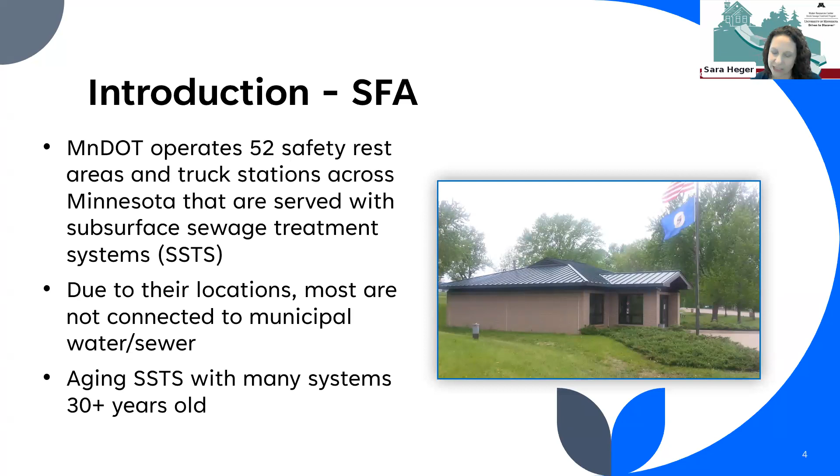I think when we started our partnership with MnDOT, with Neil Ryder, who's going to be talking later, he had recently inherited all of the infrastructure, including many of these old septic systems that were likely in need of replacement. But when you have a lot of things that might need replacement, how do you actually prioritize that? That really was the goal of how this project started: to evaluate every single system.

So we wanted to not make assumptions, but to go out in the field and look at each system, and then work with MnDOT to develop a risk framework for how they could plan for the future, over the next 5, 10, 15, 20 years. The other nice thing is that once you have a good inventory, it also gets easier to plan for the future and know when upgrades might be needed long-term.

So the framework that was developed was meant to support and be a decision support tool. That certainly assists with budget planning. And I think the great thing that we didn't know at the U of M when we started this project is that we would have sites where we could continue to do research.

The great thing about these rest areas is they are used all year round. There's some seasonality to some of them based on where they're located, but in general they're used by a wide range of people at a pretty consistent level, and they're very accessible. So they're really good locations to do and test research activities.

I will discuss, though, that they're not exactly the same as what you would envision at a house or maybe even at a resort, because they're a little unique in what happens when we go to the rest area.

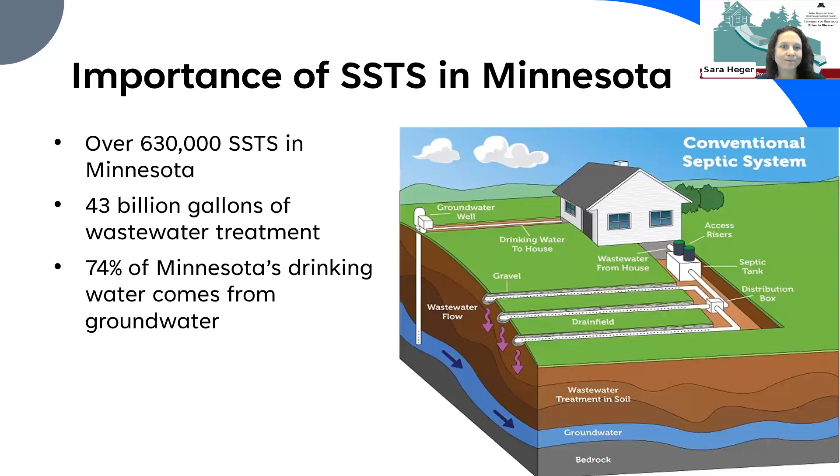I also want to highlight how our septic systems fit into the broader scale. Whether you're in a rural landscape, or think about that being a rest area, we are often either recharging groundwater or recharging a lake, river, or stream with the effluent from our septic systems. This is also true of some municipalities that are pulling up groundwater and sometimes discharging into lakes, rivers, and streams. But septic systems are always discharging subsurfacely—that is the big difference between traditional wastewater treatment plants and a decentralized septic system.

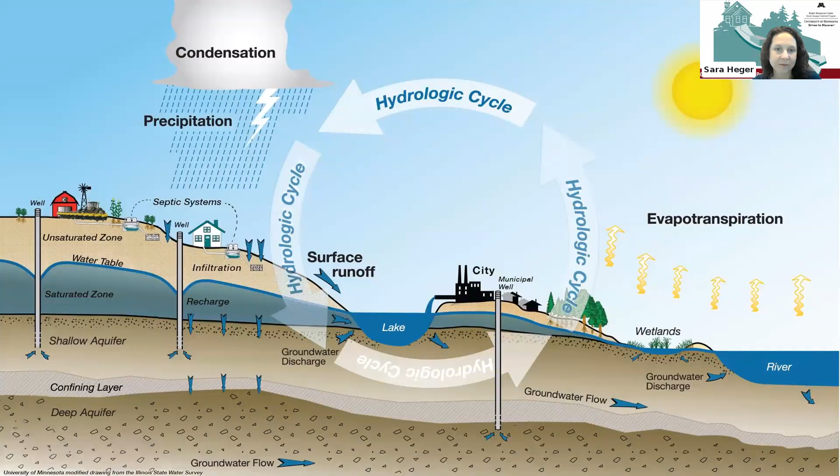So as I mentioned, most septic systems start with really a simple primary clarifier, which is really what a septic tank is. The wastewater does spend several days in that tank, so we do also get some anaerobic digestion. Then with most systems, again, our final treatment and disinfection happens in that subsurface soil treatment system.

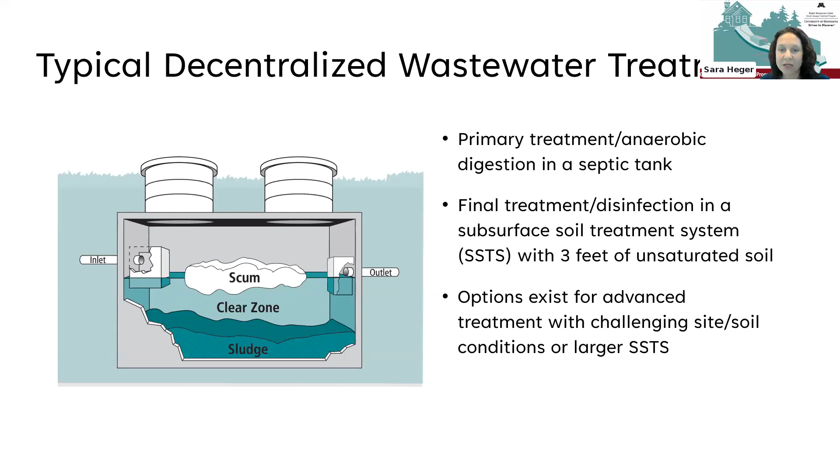And we rely upon 3 feet of unsaturated soil to remove the organics, to remove particularly the bacteria and viruses, the phosphorus. There are additional pre-treatment steps that can happen before the soil. And there are certainly MnDOT sites that employ advanced treatment in between the tank and the soil. Those are more commonly used when you have either a challenging site or soil condition, or with some larger septic systems. So larger might be clusters of homes, or might be something like a rest area.

So I do want to highlight, though, that MnDOT facilities are different, and that was some of the things we evaluated during our risk assessment. The first issue you'll see is flows. The flows are going to be higher than typical homes. And again, there is some seasonality, particularly with some rest areas. I think about, for instance, the one outside of Brainerd on 371. You can envision that, yep, some people go up in winter, but boy, do a lot of people hit that facility in the summer. But then you might take another one, Albert Lea along 35, might be busy all year round, but there are some seasonality issues.

The second issue is strength. The waste is much more concentrated because when you go to the rest area, what do you do? Right? You flush the toilet, and if we're lucky, hopefully you wash your hands, but there's no showering, there's no laundry. So the third thing is, and this kind of relates to the strength, there is a lot of cleaning. I mentioned how nice and clean MnDOT rest areas are, but there is a consistent use of products, at, I would say, a slightly higher level than most homes, maybe not all homes.

Our fourth challenge is where these systems are located. Often rest areas are built on a side of a road. Maybe there was previous construction debris or staging that occurred, or why did we end up with this land? Sometimes it's because it wasn't desirable for other reasons. So that can create challenging site conditions.

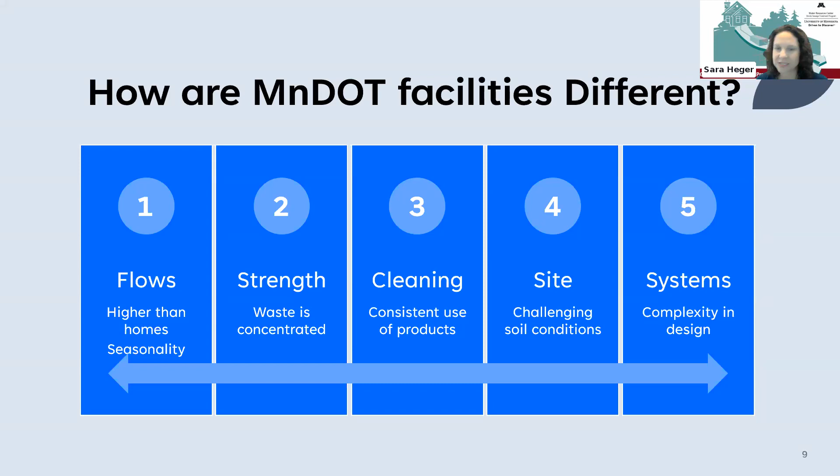And the last one is the systems. The systems in general tend to be not as simple as what we see in typical backyard home septic systems. So when we first went out there, we ran into things like siphons. I had actually never seen a septic system that employed a siphon, and that's not super complex technology, but it just highlights how we tend to see more pumps, more lift stations, more things that need to be taken care of.

So here again kind of highlights the big project we had, which was in 2014 and 2016, where we went out and evaluated all of those septic systems. So it started with really developing the protocol, like what are we going to go out and look at? And we went to a few sites to test it, because until you really get out in the field and start looking at systems, you may find things that you missed.

So after that, we then performed the actual assessment. So that was, again, visiting all of them and gathering all the information, which I'll highlight coming up. Then we developed recommendations, and all along, this work was all done hand in hand with MnDOT. And then finally, we completed the risk assessment. And after I'm done, Neil's going to talk more about how they really took that risk assessment and moved forward with it.

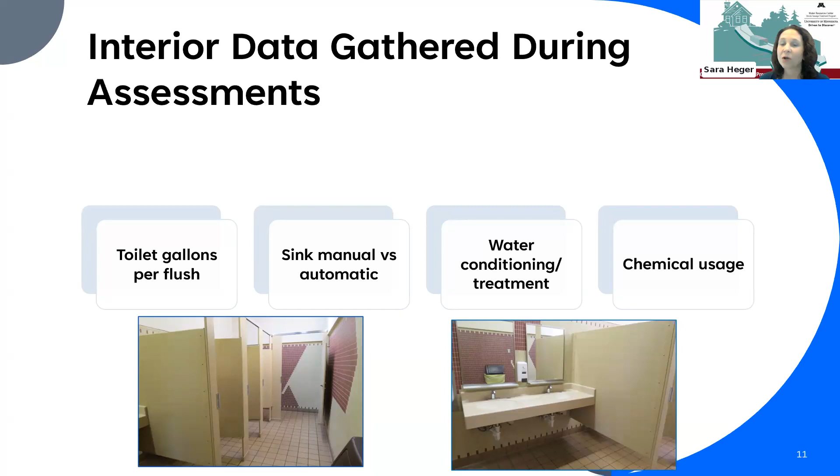So some of the data we gathered, we started with inside the facility, looking at, again, how many toilets, how many gallons per flush of the toilet, how are the sinks set up? Are they manual or automatic? What other water usage? So do they have any water conditioning or water treatment? What are the cleaners and chemicals used within the facility for sanitizing?

So additional data that we gathered inside would have been the flows. So all of these MnDOT rest areas in particular had been writing down daily flow meter data, which I'll just tell you most facilities don't do. So we had some pretty good daily flow data. MnDOT has gone to automating more of that data, which is great, but it was great that at this time, think about this many years ago, they had been gathering that daily data. Because we're not on city water, so we didn't have that other infrastructure built in.

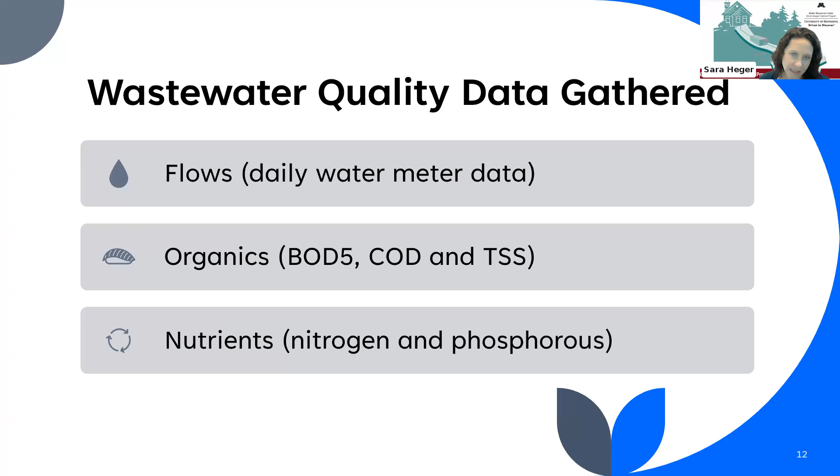The next one is we measured the organic content. So the BOD and the COD and the TSS were all just a measure of, again, how concentrated is that waste stream. And then the last one is the nutrients, the nitrogen and the phosphorus. Anytime you have primarily toilet flushing, these are going to be elevated compared to typical domestic strength waste.

So then after we kind of gathered that data, we then really looked at the septic system itself. So everything from how often had they been maintaining the system. So those septic tanks do need to be cleaned on a regular basis. Are there any problems or challenges that had been faced? But then really the nuts and bolts of what was in the ground.

So most of these systems had drawings, but the drawings were what was originally engineered. So comparing that to what was installed and what was the state or the condition of each of the components. So the septic tanks, how the wastewater got from the septic tanks to the dispersal system. Was it gravity? Was it siphoned? Was it pumped? How large was that soil treatment system? And did that match the flow data?

So when these facilities were designed, they had to estimate what the flow data would be. And again, then the status. So how well was each component performing? And then even something as simple as what's growing over the top is a very important issue. You don't want trees and brush, right, growing over the top of a soil treatment system.

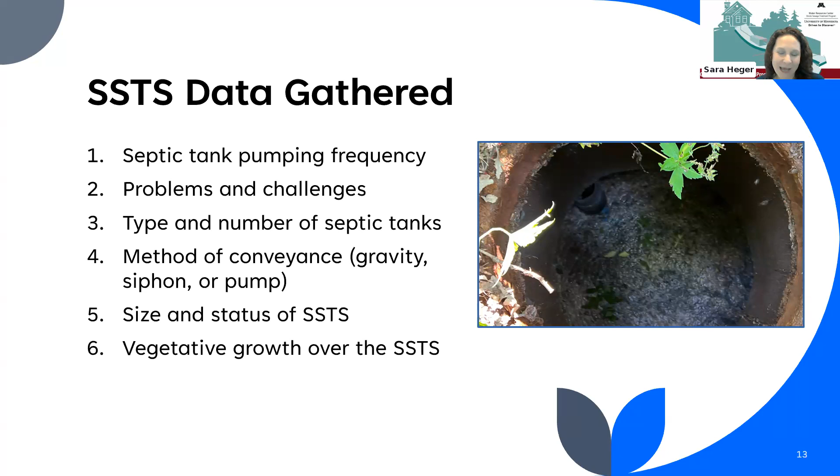So this data was then all fed into a risk assessment. The risk assessment had both a rating and a weight to many of the variables. We really gathered, I think at the end of the day, over 30 different things that could have fed into this risk assessment. And we really then had to determine which of these really was impacting the risk to public health and the environment. That is what septic systems are designed to do, is protect public health and the environment.

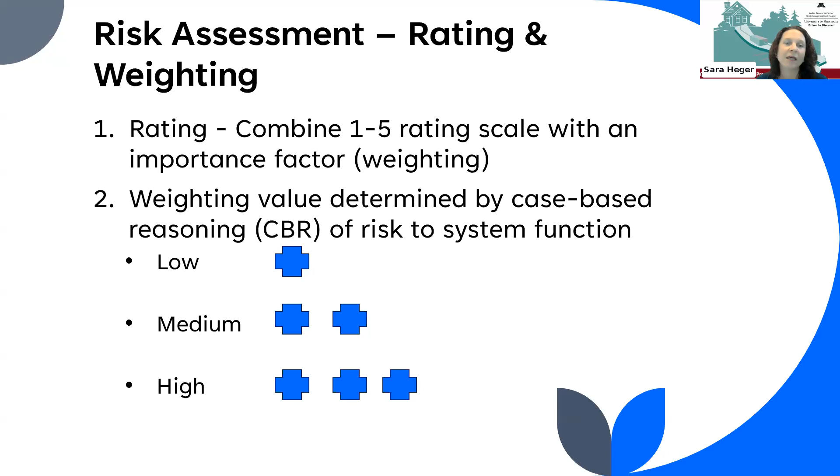So the weighting was either given a low, medium, or high. And it was a case-based reasoning approach that was taken to our risk assessment. So this risk rating, and again, Neil will talk a little bit more about this later, was based on an existing MnDOT rating scale that was used for other infrastructure measurements as far as what status they are. So that scale, again, being 1 to 5.

So we ended up using 18 properties that both best differentiated and indicate risk; that's what we selected. And we had to use some expert knowledge to rate each of these properties. So here's just one example, and I can't get into great depth, but one that I think is kind of easy to understand is flow. So as the system goes up in scale, the risk that it poses to the environment is greater.

So I haven't talked as much about the truck stations. Those are, again, pretty small flow systems, generally just serving the employees that work at that truck station. So those were all in the low flow category. So for this, they would have, again, had a low risk factor. But again, as the flow went up, you can see, there were 8 in that smaller category, and then only 2 that really were above, that had that high risk factor of 1, being over 5,000 gallons per day.

And in Minnesota, again, most of our systems generally fit into those low flows, but we do increasingly have more and more community and cluster systems being built. And that's a lot more water that is going out into the environment.

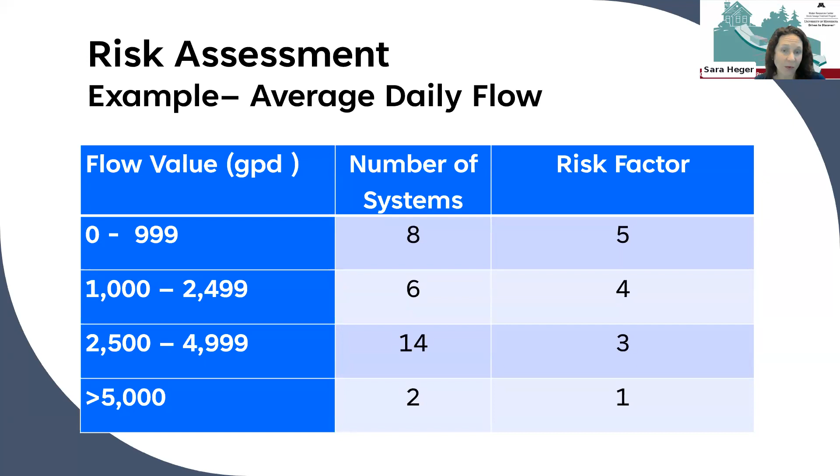So then our examples of that case-based rating that we added. So looking at this and just some example of how that was used. So for each of these we would either amplify or keep it as is. So that average flow, you'll see here, 1.5. If it was surfacing, that was viewed to be a bigger issue. So certainly if the area was spongy as we walked over it, or there were signs that the system had surfaced, that got amplified in our risk assessment.

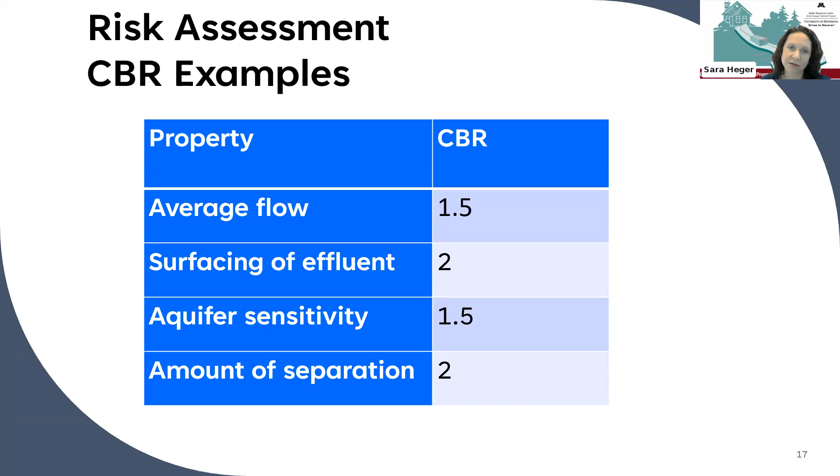If the aquifer the system was sitting over was sensitive, that got slightly amplified. Or if it didn't meet its separation to the limiting condition, that also would have been amplified. So where we ended up, in the high risk category there were 7 systems that really fit into that. We did not have any that were 1, which would have been very, very high risk, but we had 7 in that category.

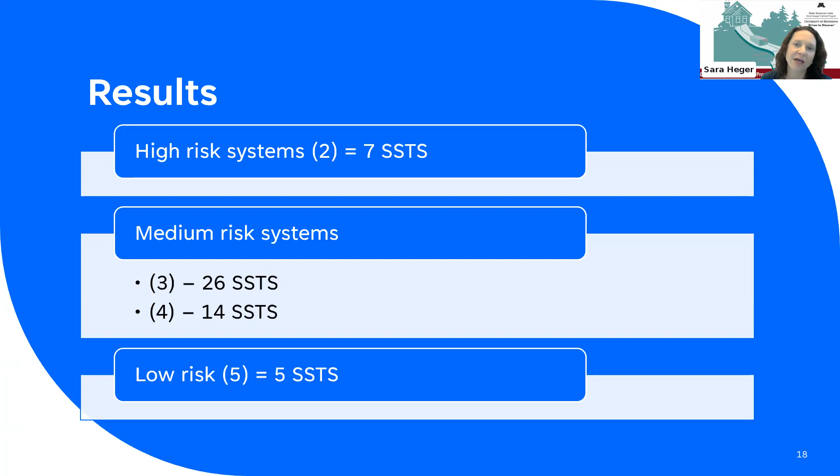We then had, you see, of the 3s and 4s, if you add those together, 40 additional systems there, and then we had 5 that really were very low risk. So these results could then be taken and used by MnDOT to prioritize which systems we are going to evaluate and look to improve in the future.

So that's kind of an overview, and with that, I'm going to go into some of the follow-up research. The nice thing about this research is it's also been a way to involve students and grad students and other professionals learning more about septic systems. In this picture, you'll see several students who've gone through our program, one recently completing a master's. I'm going to discuss a little bit of her work today.

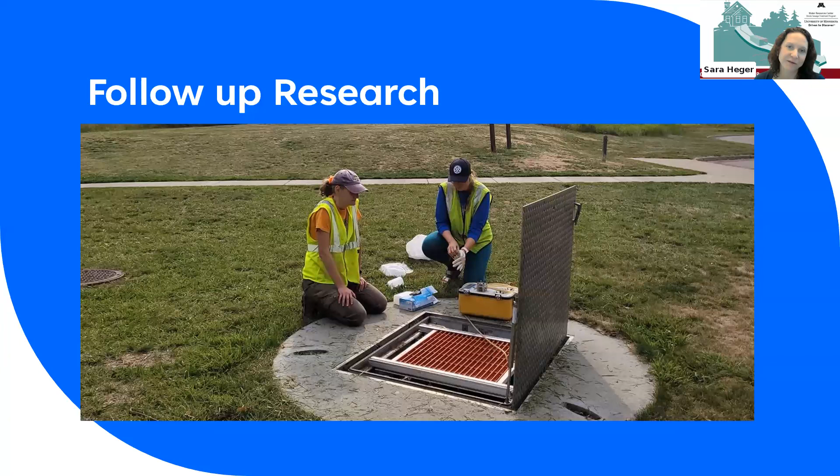So after the first project was done, again, we thought and met with MnDOT to talk about, well, in what areas do we need more information? So the first one, and anyone I have a star by, I put there so I remember I'm going to talk about a little bit more in detail, but water table monitoring. If you remember, one of the risk categories I showed is that it didn't meet its separation. Well, how we generally determine if a system meets its separation is by looking at the soils and redoximorphic features. But you can actually monitor where the water table is.

So that has been a really useful ongoing project to get more detailed information about how often the system is truly not meeting its separation. The second one was some educational work that was done, which I'll discuss. We also started sampling flammable waste traps. And this was really phase 1, which we'll get into more here, looking at what's in those flammable waste traps, what's flowing through, particularly when we're washing down trucks, and what are some of the options to deal with some of that waste, which is very different than the waste we've talked about so far.

The next activity during this project was development of O&M manuals. So again, if you think about those 52 septic systems, they didn't have O&M manuals. And the people often managing those on a day-to-day basis are not septic system professionals. They wear many hats. So giving them a tool that they could utilize to understand what they have and what they need to take care of it.

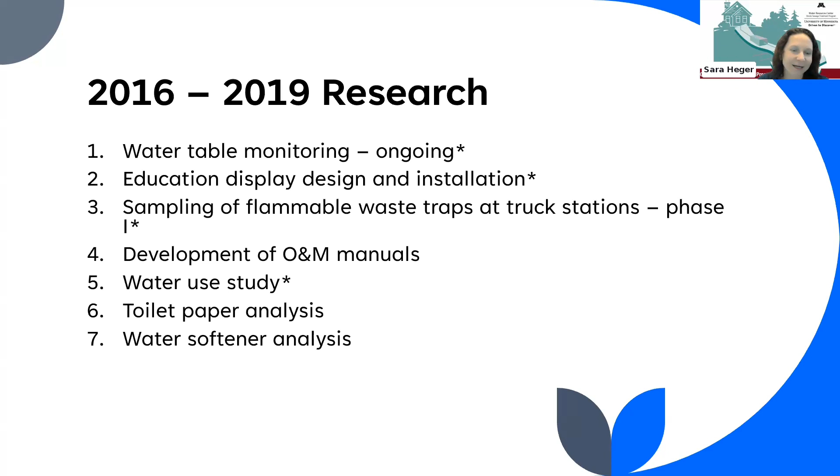The next thing we did was a water use study, which I'll highlight coming up, and a couple other fun things. We tried to figure out if there's a better toilet paper, and we didn't come to any strong conclusions there. And then the last one is we looked at potential impacts from some of that water softener brine water.

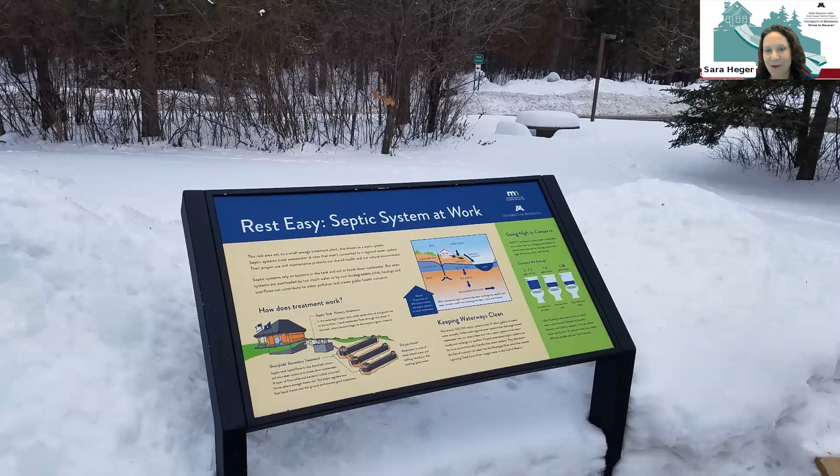The water use study really dated back to when these septic systems were originally designed. In 1979, MnDOT actually did a water use study. They found that if the site had water conserving devices, it used 2.8 gallons, versus 4.5 for non-water conserving devices. It was expected that these numbers had shifted downward, but we didn't have any data.

Our study was probably a little more precise than what was done in '79. We actually put door counters in, so we knew when people were going in or out, which is more accurate, although they probably had someone standing there counting for shorter periods of time.

So in the results, we did do some comparison between interstate and non-interstate sites to see if there was a difference, and you can see a bit of a difference, though there's no really good answer necessarily. The theory could be less cleaning, or water treatment may impact that, as some of the interstate rest areas tend to be a little busier.

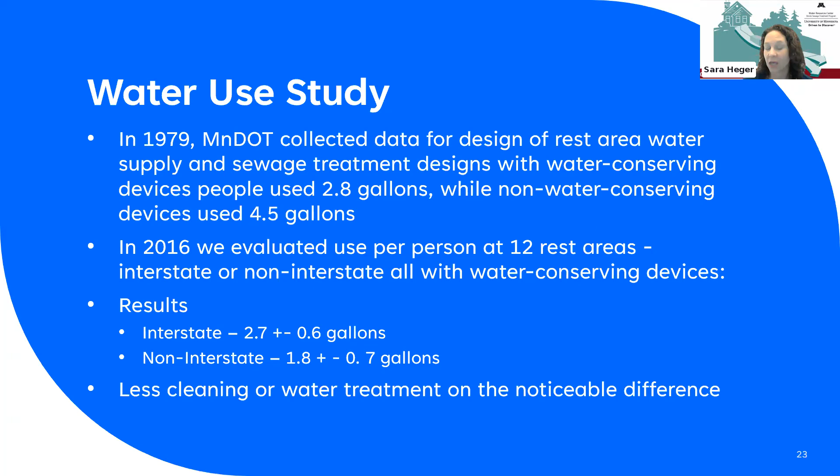So the next one I wanted to touch on is reuse at truck stations. Again, the goal is thinking about that water, particularly what was being washed down from trucks. We did a big overarching look at reuse.

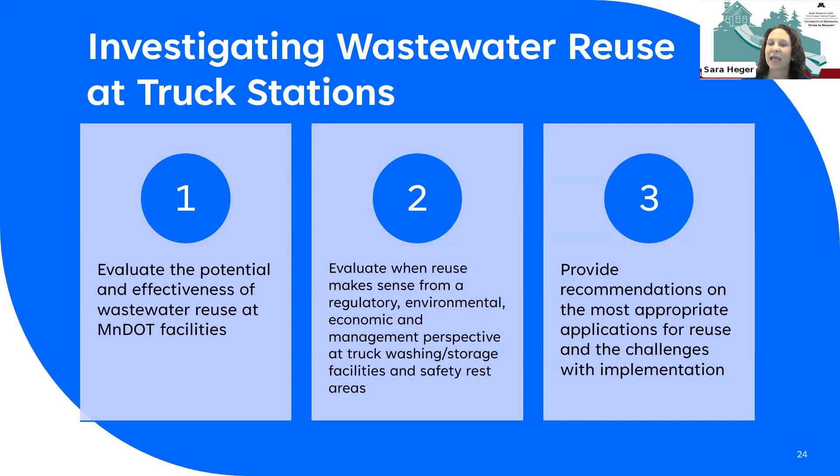To me, we're reusing all of our wastewater, it's just a matter of how soon. So what we were looking at here is whether there's a more direct way to reuse wastewater within a facility. That was the big picture. So we looked at where it makes sense from a regulatory, environmental, and economic impact standpoint, and then provided some recommendations about where reuse might make the most sense.

This also led to some sampling of that washdown water. One of the highlighted waste streams was that during winter, when trucks come back from putting salt on our roads, they need to be washed down - you can't leave that salt sit in them or it'll impact them. Typically that brine either goes to a holding tank, or directly to a municipality. And if it's going to a holding tank, it's often pumped and taken to a municipality.

Many of us have heard that chlorides are a growing challenge in many of our surface waters. So it was a logical point to say, can we take this salty water from our trucks and use it to make brine?

So we went out and sampled that water, and we found that there were some organics that just tend to come with the water, and a bunch of chloride. But if you're looking to make brine with it, the chloride's not a problem. If you were looking to use it on the landscape, obviously it would be.

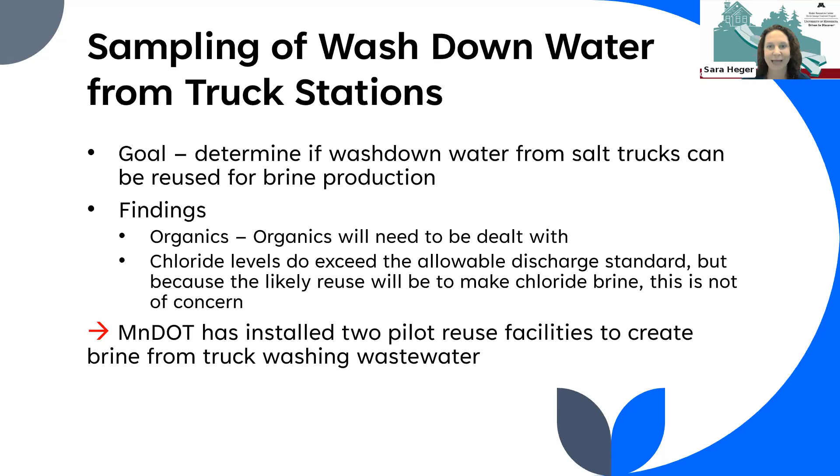After this research was conducted - probably one of my happier moments in doing research - the research was taken and implemented. We made some recommendations about options that could be done to deal with the organics, and MnDOT went ahead and installed two pilot reuse facilities that now take that truck washdown water and create brine. I hope to see more of this in the future.

So the rest of these I'll go through a little quicker, so I meet my 30 minutes here. We've continued the water table monitoring and the flammable waste traps. We moved into phase 2, which was the demonstration. We also started looking at additional things, like evaluating the soil around septic systems and really looking into how septic systems deal with contaminants of emerging concern.

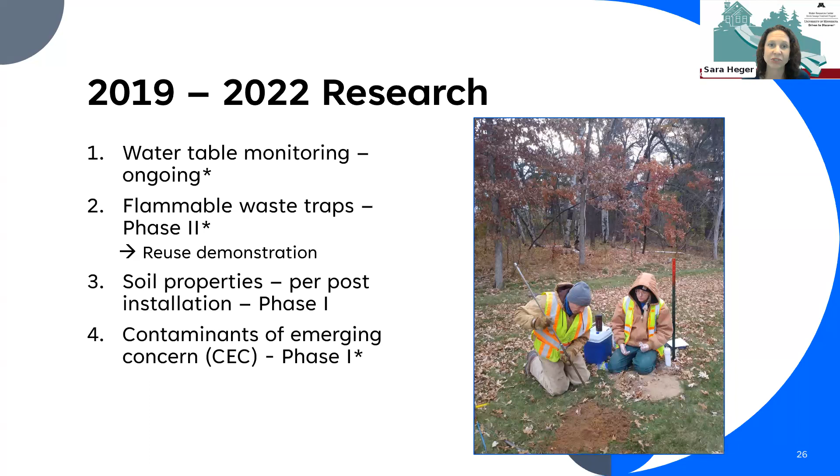This is something most of you have probably heard of, but the chemicals of emerging concern we were really focusing on are the ones based on human consumption - personal care products and pharmaceuticals. If you think about people using the toilet at rest areas, that's what we're going to get.

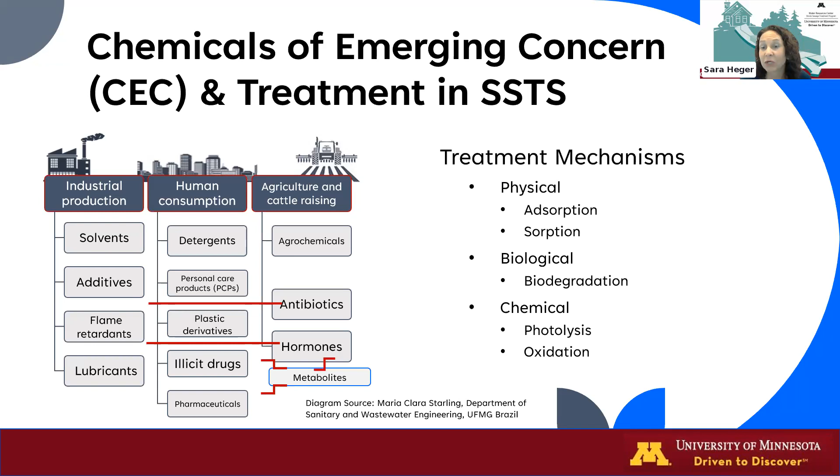So we're really looking into the treatment mechanisms occurring in septic systems - physical, biological, and chemical treatment that could be occurring within these systems.

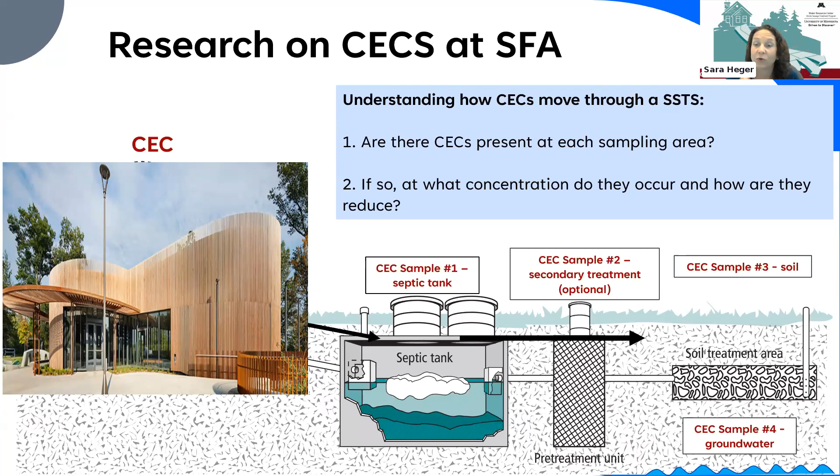So we've been thinking about the source, which would be coming out of the rest area, sampling what's leaving the septic tank. If systems have advanced treatment, we've been sampling there too. We've also been sampling the soil and groundwater to follow how the CECs break down throughout the septic system.

What does that tell me? Well, it wasn't consistent. We found some of this sticking in the soil, absorbing to the soil at some sites and not other sites. The other consistent trend is there are a lot more CECs in the septic tank than groundwater.

So we do know that the septic systems are in fact removing contaminants of emerging concern. So lastly, what are we working on now? Well, we're still monitoring water tables. We actually started doing some temperature monitoring to see what kind of temperatures we have in the soil and how that could be impacting treatment. We're looking at the waste that actually comes out of flammable waste traps, which would be more sand and debris.

We did a laboratory, a more controlled greenhouse study looking at CECs. We're going to be moving into looking at groundwater mounding, continuing to do soil properties. And kind of the last thing is looking at, well, what about when these tanks get cleaned? And that waste is referred to as septage.

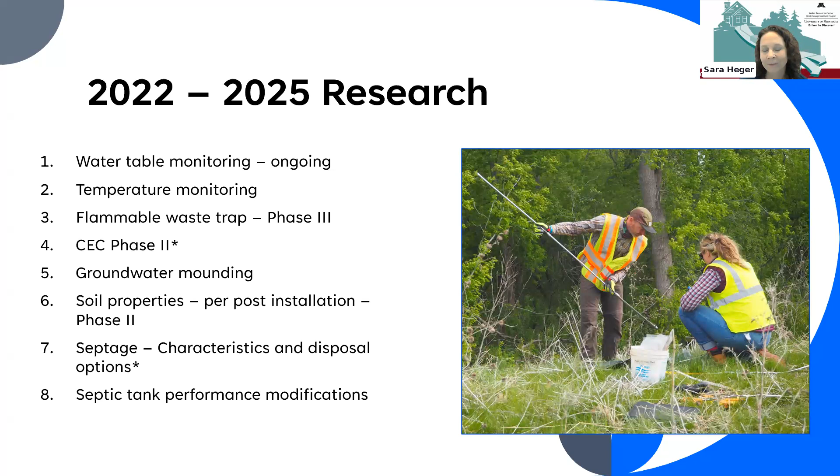So looking at what is really the concentration of that waste and what are the options. And the last thing is our septic tank designs have changed very little since they really came out in the 50s and 60s. So we're looking at some modifications that could potentially improve that primary treatment that occurs in septic tanks.

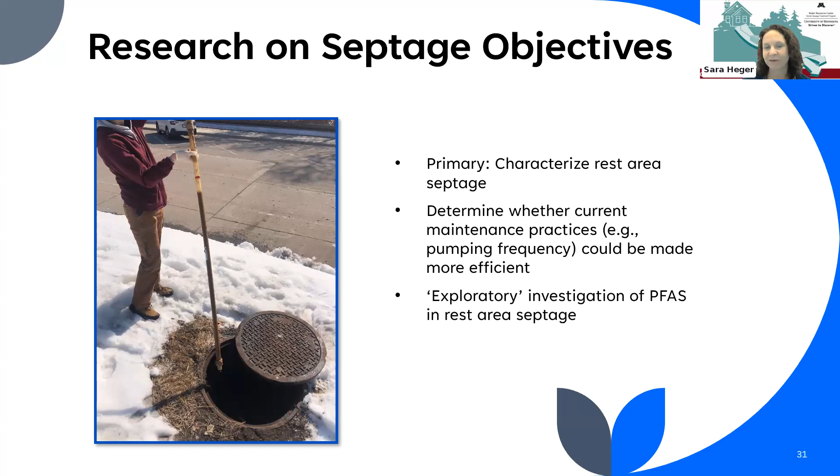The septage objectives, the only other thing I'll highlight here, I kind of covered this, is we're also doing a little bit of a look at PFAS levels because that's certainly an emerging contaminant. And we don't expect rest areas to be a large source of PFAS, but we've probably all heard it's even in toilet paper, so who knows?

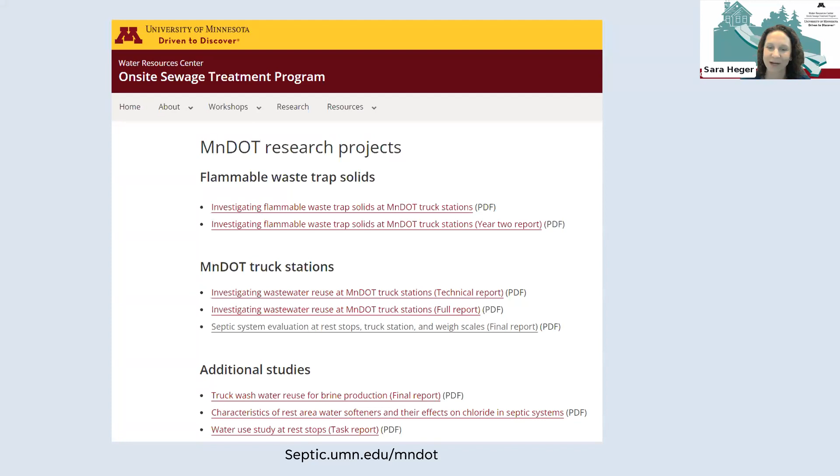So for more information about the research we've done, our website across the bottom there, septic.umn.edu/MnDOT, has all of our MnDOT studies. Our CEC research is currently going through the publication process, so we don't have anything posted right now until it goes through the peer review process. We can't release it, otherwise they won't publish it for us.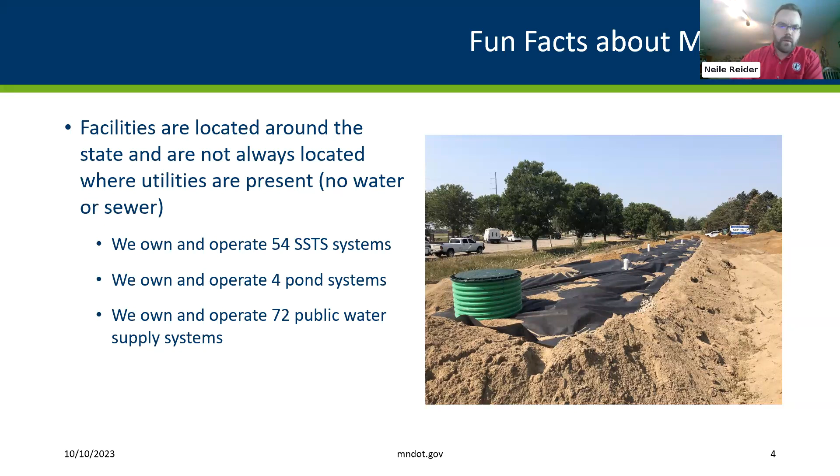So the original evaluation occurred at safety rest area systems, truck stations, and weigh scales, primarily because that's where these facilities are located. Sarah wanted, and what I really wanted, was a standardized approach to our assessments. Really what the goal was is we wanted a centralized assessment model, so that we were always looking at these facilities through the same lens, and so that every facility, whether small or large, we're assessing consistently in the same manner, so we have an apples to apples comparison. And then we wanted that risk analysis approach, so that we could compare those systems against each other and evaluate, rank, and prioritize our approach.

Really what I was trying to do was take a more proactive approach to the SSTS management of our systems versus a reactive approach. All I mean by that is I was trying to do a better job at planning system upgrades to our facilities. What is a reactive approach? That's when a pipe breaks or something goes wrong and I get a phone call from one of the districts that we need to do some work. I was trying to take some of that reactive approach work and push it into a proactive, better plan system management. The reactive approach never goes away - stuff happens, things break, and I still get the phone call - but I was trying to move a chunk of that work over into the proactive, and actually manage the budget a little bit easier, a little bit better. The other big thing was to identify issues before they become emergencies.

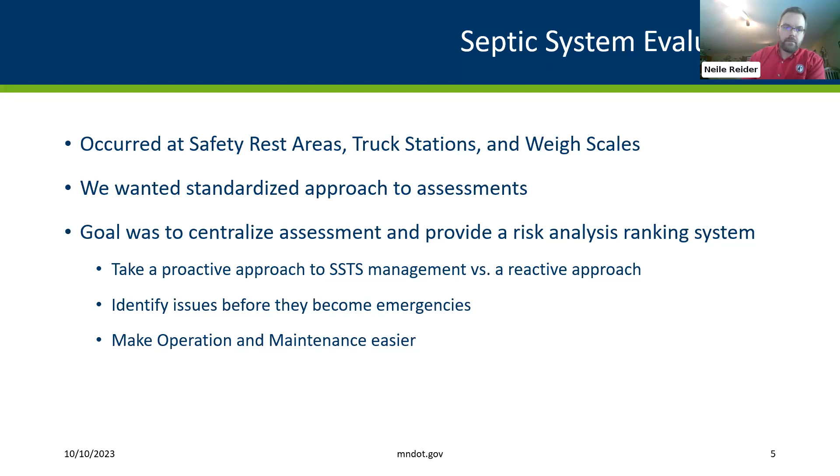So we chose a 1 to 5 scale system. The reason we chose this ranking is because around the same time we were doing this work at the statewide enterprise level, the facility condition assessment was starting to occur. That data is held in Archibus, which is the image on the right of your screen. That was an enterprise-wide initiative to evaluate all of our facility conditions. The system the facilities were using is a 1 to 5 scale, where 1 is crisis failure and 5 is excellent condition. Then 2, 3, and 4 would be poor, average, or fair and good condition. So we just used that.

The reason we used that system is so we didn't create yet another system we'd have to learn, and so that we were using a system that was already being used enterprise-wide, meaning the assessment could be translated easily into Archibus and back and forth, creating a 1-to-1, apples-to-apples comparison with other initiatives going on statewide.

Here what I've circled on the screen is the Kettle River rest area that I pulled up. This is the actual condition assessment. We have staff that went out and evaluated the drain field in good condition, so number 4, and the actual septic tanks in fair condition, a 3. That way we can take that data and import it back into the risk assessment, so we can use data collected through other means in our risk assessment.

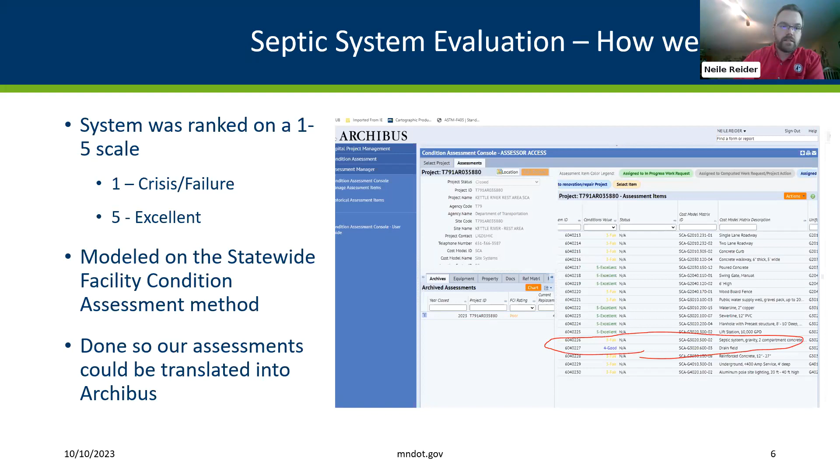So the facility condition assessment was coming online at a similar time we were doing this work. Subsequently, around 2019, a site condition assessment also became part of what was going on at the enterprise level. Those are physical evaluations of the on-site assets, really condition assessments - is it good quality, bad quality, excellent quality, or crisis? As we talked about, we have 900 facilities and roughly 300 sites, which is a lot to look at.

So the natural cadence of the FCA and the SCA is to look at each of our facilities on a 3-year rotating basis, so a third of the systems per year, meaning each facility gets looked at on a three-year basis. The FCA and SCA are different but related to this work. I can take the data out of Archibus and import it into a risk assessment, continually feeding data back into the risk assessment model we created, so the system itself reinforces itself.

This picture is actually Mike Ligday, one of my coworkers, out in the field collecting data on our sites. You can see he has a GPS unit on his back and a computer on his front. As he's out in the field, he's collecting real-time data, importing it into the databases, and capturing the physical location of where we're finding this stuff.

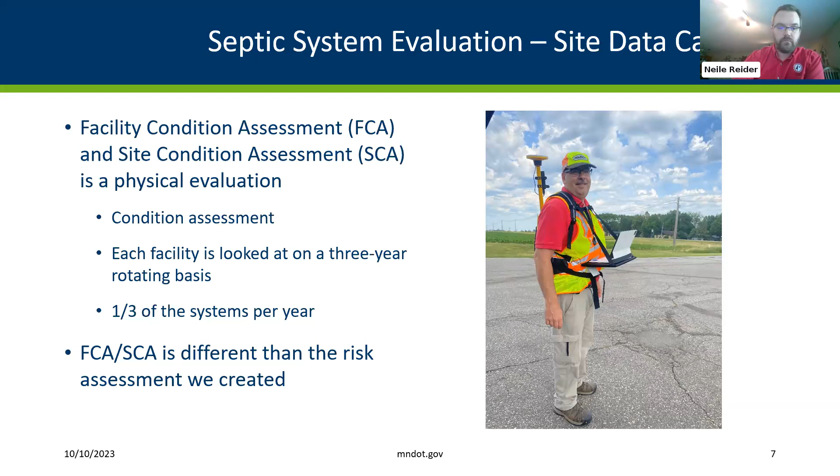The FCA and SCA data is stored in Archibus, that's the program I showed earlier in the screenshot. We're also collecting the physical location - that's the GIS system, using a Trimble Catalyst unit - so we physically know where all of our assets are located.

That feeds back into operation and maintainability - do we know where all of our stuff is located, and can we easily get access to that system? The answer through the GIS is yes. We've gotten out there and accurately mapped all of our infrastructure, and now we can find it, so end users in the districts, if there's a question or a broken pipe, have this information at their fingertips, or can get access with a simple phone call.

We also have record and design drawings showing the approximate location of where this infrastructure was installed. All of this data, coupled with the risk assessment worksheet, is what I use as we're planning and programming additional work. So when I'm planning my work, I use a number of different pieces of information to help plan the work that we're going to do.

This image here is actually General Andrews, which is the sister rest area to Kettle River. This is just showing where all of the infrastructure is located on site, and the brown-orangish color infrastructure heading up the highway is actually all of our wastewater infrastructure on that site. So with the districts, whether they wanted to go into the GIS or not, now they can actually see where everything is located on site.

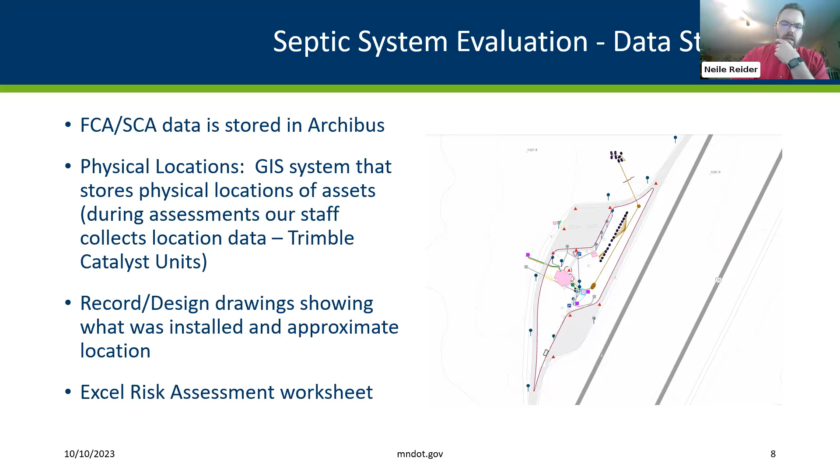So an example of this process at work: this was at our Adrian septic system. Adrian is actually westbound, heading into South Dakota along the I-90 corridor. As part of the routine inspections that Mike Ligday was doing, they found a drain field that was non-functional, so he gave me a call to alert me what was going on.

With another simple phone call to the district, through some valve modifications in that drain field, we were able to redirect all of the wastewater to a different drain field located on site. We were able to shut off the non-functional drain field, keep the facility operational during this entire work, and actually construct a whole new drain field. I wanted to highlight this because of maintainability and operability, and actually not shutting down a rest area.

We want robust systems. These systems operate 24/7, 365. So even just modifying the valves and being able to redirect wastewater is why we didn't have to shut down the rest area to do this work - there was enough redundancy in our wastewater infrastructure that we were able to make a few simple modifications with a couple valves we had designed into the system, to keep the system functional, keep the public and the environment safe, and allow us to do additional work.

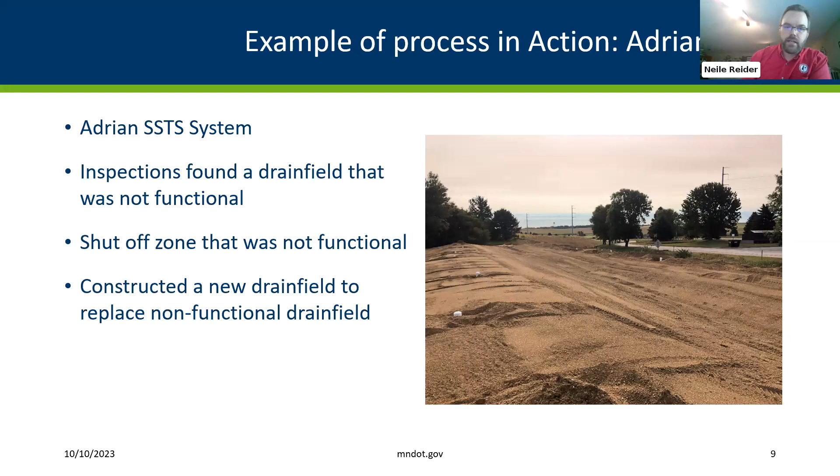The other thing that, and Sarah talked about this too, is the O&M manual. That was a critical piece of this. The work that we did highlighted some information gaps that we had in areas that were pretty easy to enhance. So we created and wrote O&M manuals for each facility. The O&M manuals covered the organization of the system components - tanks, lift stations, sewers, drain fields, and other components - the maintenance requirements, as well as some troubleshooting. So if something was going wrong, it gives ideas for how to fix those issues.

Really what we were trying to do here is, especially as retirements occur and people that were familiar with the wastewater infrastructure leave and new people come on board, we wanted to make sure that there was continuity of knowledge that was passed down. One of the ways that we did that was through these O&M manuals.

Sarah highlighted this a couple of times too: these systems typically are not the systems that are in people's backyards, which is a tank to a drain field. This picture here is at the Tettegouche State Park / rest area up on the North Shore. If anybody's been there, there's a bridge just before you get to Tettegouche. Our force main to our septic system actually runs underneath the bridge, attached to the bottom of the bridge deck. This is the force main from the septic system, and the drain field is across the river valley from where the main septic tank and lift station is located. This is a complex system, with a lot of different controls going on, and heat tape and heat trace systems in order to keep this pipe from freezing. So our systems get quite complex quite easily.

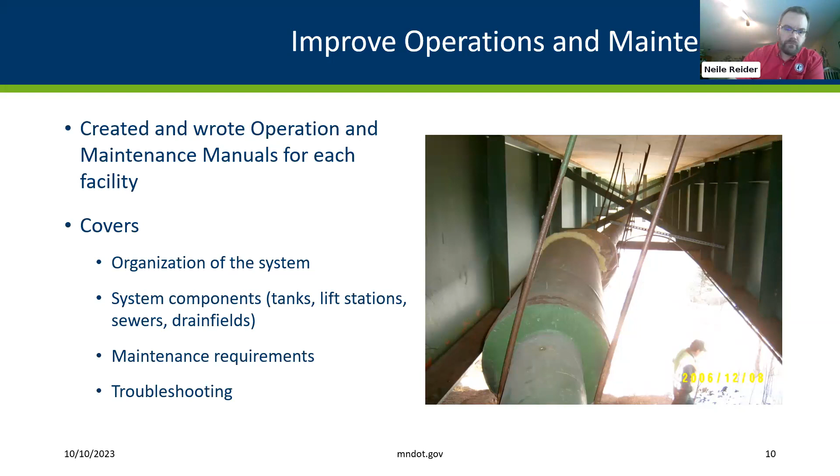And so then the pumping, that's always out there and a complex issue for us to manage. We end up needing to pump our septic tanks, I'm going to say 2 to 3 times a year, with probably 2 times per year being the most frequent pumping that we have. Some facilities are 3, some are 1 time a year.

We have significant solid loads to our tanks, and that's mainly toilet paper and human waste. If you think about, especially our rest areas, that's the only usage that's going on there, with some incidental cleaning going on. So a lot of solids go into our tanks. Our tanks fill up quickly, and the contents in the tanks tend to not break down very well. And so we pump those tanks frequently.

So we spend a lot of time, energy, and effort trying to figure out how to pump our tanks better, or actually design systems to improve the pumping so we don't need to pump as frequently. And that would be the ultimate goal. One of the things that we did early on is I actually gave sludge judges, which are just a tool to measure sludge in the tank, to all of our districts to help them optimize their pumping.

And what came out of that is that 2 times per year was just about right for most facilities, usually right before the busy season, and the busy season for rest areas is summertime, and just after the busy season, which is typically fall. And this image here is just a cover page of what one of our O&M manuals looks like for our wastewater systems.

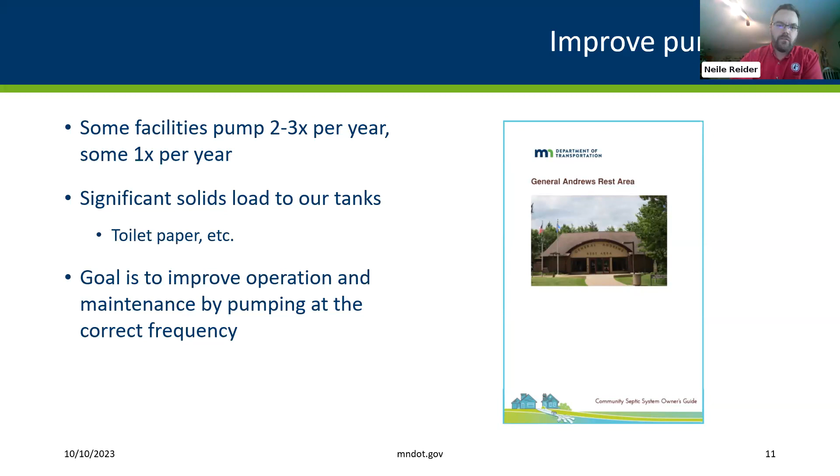The other aspect that's going on out there too is that there have been executive orders out for a number of administrations. Dayton had a couple of executive orders with water reduction, and Governor Walz similarly has a water reduction executive order out there. The current executive order is to reduce water consumption at our facilities by 15% by 2027 relative to a 2017 baseline. So that's the goal that we're working at.

And what that means is that we're taking the water out of the sewage, which increases the waste strength of our sewage. And so we're really understanding what the implications of that are. The only real lever that we have in order to reduce water consumption at MnDOT, especially at rest areas, is the fixtures that we use. So we look a lot at the urinals and the toilets, and we try to reduce the amount of water that those fixture units use.

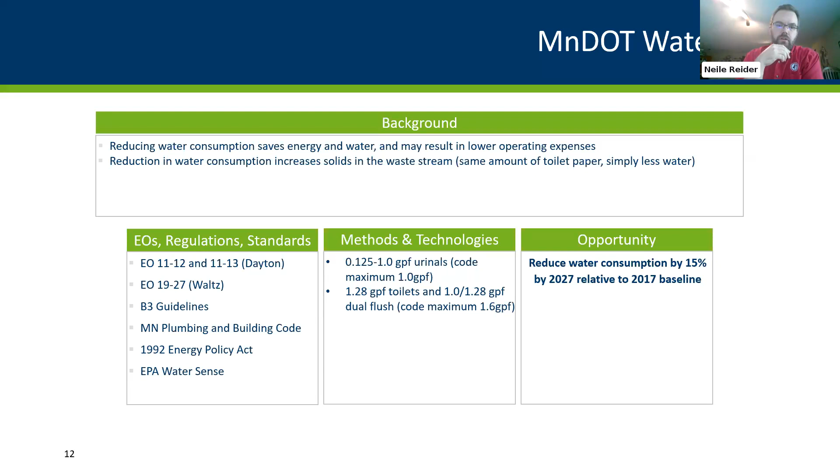And what we're doing now is we're really looking at 1/8 gallon per flush urinals and 1.28 gallon per flush toilets. And that is a surprising amount of water that we can reduce just by changing that. Rest areas are high intensity buildings when it comes to water usage, and they use more water than any of our other facilities. Their primary purpose in life is for people to come and use the restroom and flush the water down the toilet. And so they're just these really high intensity buildings.

So at Marion Rest Area, we did a fixture replacement there. This was an older facility, and they just had older fixtures there, and they had some old 5 gallon per flush toilets. And we took those 5 gallon per flush toilets down to 1.28 gallon per flush toilets. And we actually did that replacement in May of 2019. The highway was shutting down due to construction, and the building was going to shut down as a result. So while the highway was shut down, we came in and at that time, that's when we did all the fixtures.

And what we actually ended up doing was saving about 1 million gallons per year with just a fixture upgrade. The one thing we didn't do at this facility at the time is we didn't go down to a 1/8 gallon per urinal flush. We just took those down to 1 gallon per flush. But an interesting and anecdotal note is the urinals are the #1 thing we can actually do to reduce water. The urinals are just a high usage, high frequency device. And so the lower we can drive the urinals, the more water we save.

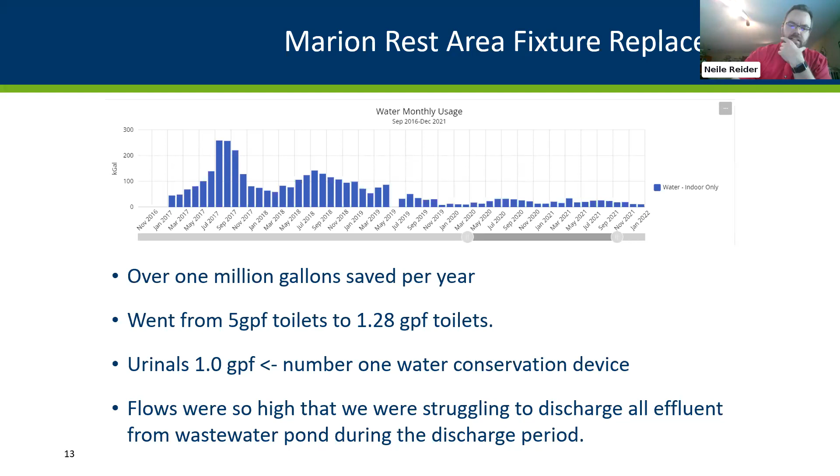And what's funny about this is prior to the fixture replacement, the flows were so high that we were actually struggling to discharge. It was a pond-based system. We were struggling to discharge all of the effluent from the pond during our discharge period because there was so much water. And with the 5 gallon per flush toilets, when those would flush out of the gravity sewer system, it was like a fire hose. There was just so much water shooting out of that system. It was a lot. And so that was a pretty big success story for us. Unfortunately, we don't have a lot of facilities that had fixtures that old, but they do exist, and we've been actively working to get rid of them.

What happens when it goes down the drain is we still end up having to manage it. Our septic tank pumpers end up dealing with it, and they pull all of that out of the septic tank when they're pumping. They can pull out a 5 gallon bucket full of needles because so many needles get flushed down the drain. And we have people who literally flush jeans, t-shirts and underwear down our toilets. There's all sorts of stuff people flush. So this was trying to improve the performance of our systems by encouraging the public to use the rest areas as they're meant to be used, specifically the wastewater system, and to stop putting stuff down the drain.

So just to summarize, the risk assessment really helped us increase our knowledge of all of our systems. It's a tool we still use to this day to help us prioritize improvements to our wastewater systems, and the goal is to move from a reactive to a proactive approach. We've done a lot with that and continue to, and it's been really useful. That initial assessment also identified some of our knowledge gaps and allowed us to focus on improving those, specifically operation and maintenance. As I said at the start, I have almost a laser focus on maintainability, operability, redundancy and resiliency in our infrastructure. Everything we do is focused on making these systems as robust as possible, but as simple to operate as we can.

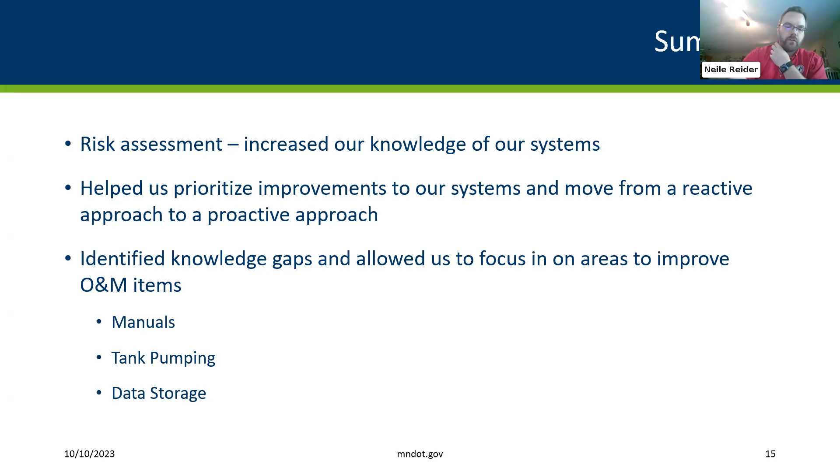Neil, really? Jeans down the toilet? That happens? I don't even know how you do that. Yeah, I always wonder that too. I think you just keep flushing, because it was so bad at the Blue Earth rest areas that we actually had to put in a Muffin Monster, which is just a grinder system, because on a monthly basis a pair of jeans got flushed down those toilets. Huh. All right, then. Very interesting presentations from both of you.